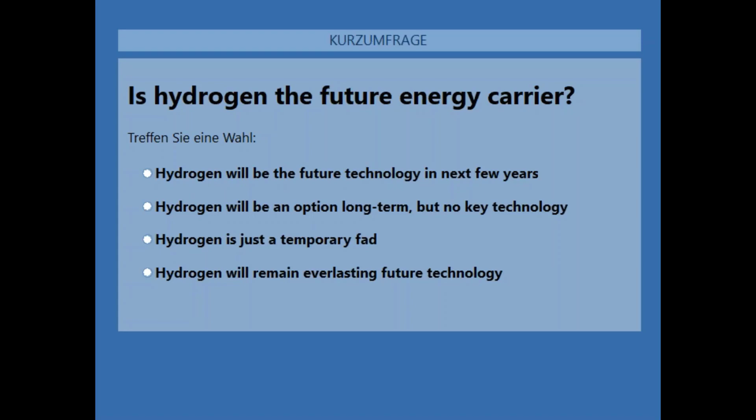Luckily, a lot of you, more than 90%, I guess, think that hydrogen will be a topic for sure. 36% think that it will be in the near future, and about 60% think that it will be an option long term. So thank you for your voting, and now we directly start with our webinar.

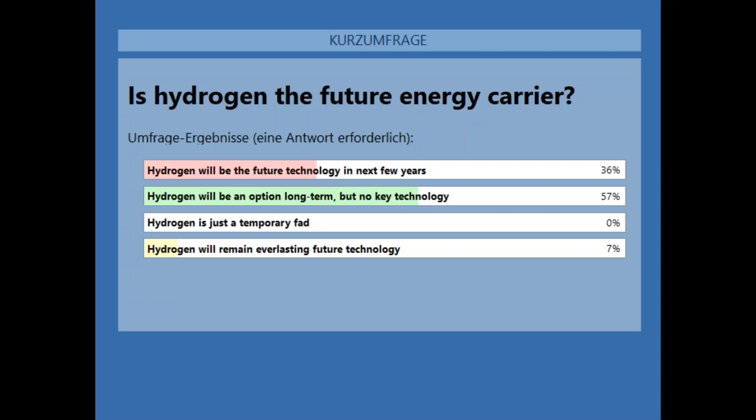So what's on the agenda for today? First of all, we will have a basic overview of hydrogen technology. Then we will have a short look at the Fronius experience. That means especially we will discuss our SOLH2UB, decentralized hub for solar energy. Then we will also have a look into the mobility topic. That means how can you run vehicles with hydrogen and also do commercial traffic with hydrogen.

But also I will give you an overview of hydrogen as seasonal storage, and at the end of the webinar we will look at the future of hydrogen and of course what is done at Fronius and what Fronius will do in the next few years.

But actually before we start, the question again: is hydrogen the future energy carrier? If you look back on the history of hydrogen, you have to go back into the 18th century. Exactly in the year 1766, Mr. Henry Cavendish, a British scientist, invented the hydrogen. Due to experiments, he invented the hydrogen. And from this time on, hydrogen is still a topic in human history.

If you look at the quote in the middle of the slide, one very famous person, Jules Verne, he was French, once said, hydrogen and oxygen will in foreseeable future secure world's energy supply. If you take a look then into the near past, in the 1960s, hydrogen was actually the fuel of aerospace. For example, for the Apollo mission of NASA, it was the fuel which was the basis for this mission.

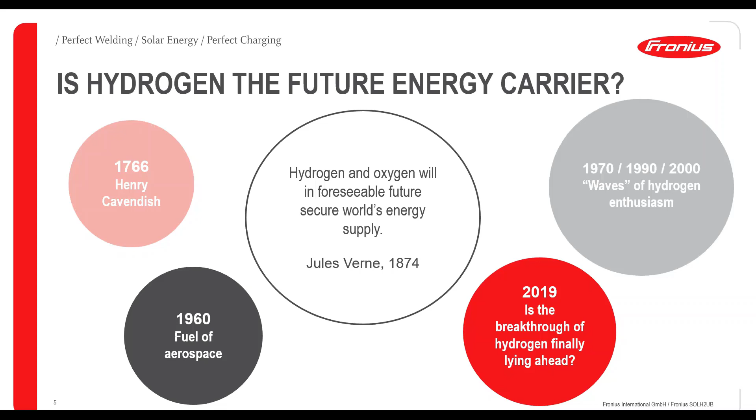Now we start with the basics in hydrogen technology. So what is hydrogen especially? Hydrogen is the most common element on the Earth, and it's nearly everywhere available. In the periodic table of the elements, like you see here, it has got the number 1, it's in the first period and in the first group.

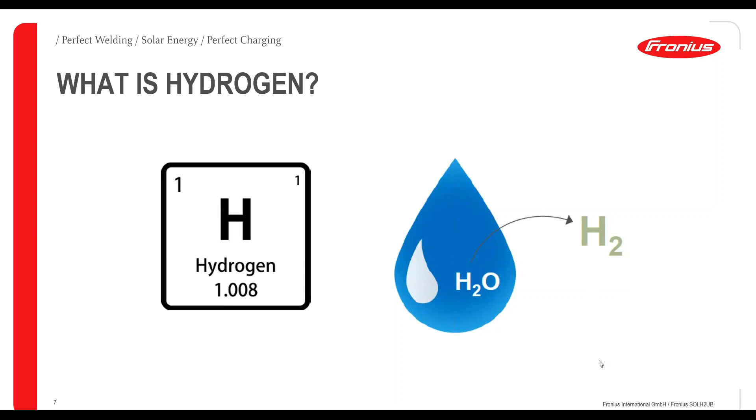That means it's everywhere available, but in the world, it's mostly accessible in bound version with oxygen, H2O. And therefore, the idea behind it is to split the hydrogen and the oxygen and save this hydrogen molecule in storage tanks, and therefore use it for powering or for mobility applications.

So if you look at hydrogen as an energy carrier, you have to say that hydrogen has a very high mass-referred calorific value. I compared here in the table three materials: hydrogen with gasoline and diesel. Therefore you can see especially the advantage of hydrogen. If you look at the mass-referred calorific value, it beats gasoline as well as diesel. It has nearly 3 times the calorific value of gasoline or diesel.

But on the other hand, it has a low volume-referred value. That means compared to gasoline and diesel we are not that well off. And that's also the reason for storage at increased pressure. With increased pressure, we of course increase the density of the hydrogen and can therefore store the hydrogen in very little space. If you compare hydrogen and gasoline directly, you can say 1 kilogram of hydrogen is equivalent to approximately 3 kilograms or 4 liters of gasoline.

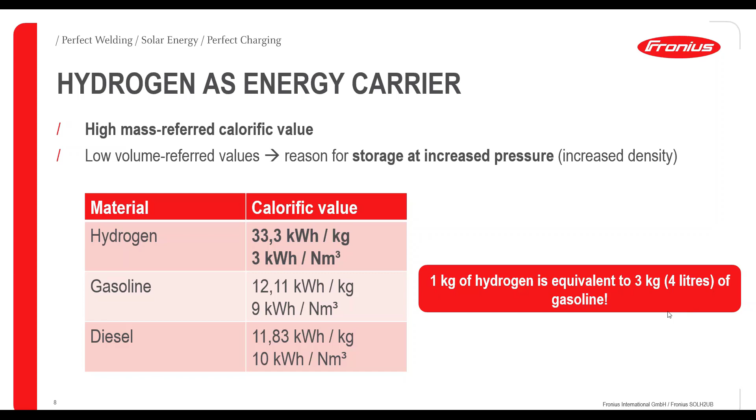So how can you actually produce hydrogen? Principally we differentiate between green hydrogen and gray hydrogen. The Fronius approach is to produce green hydrogen. But on a global level, today approximately 98% of hydrogen is produced as gray hydrogen. The difference between these two forms is, on the one hand, you have the primary energy, natural gas, crude oil or coal. That means fossil fuels, which you convert within a reformation process to the energy source hydrogen.

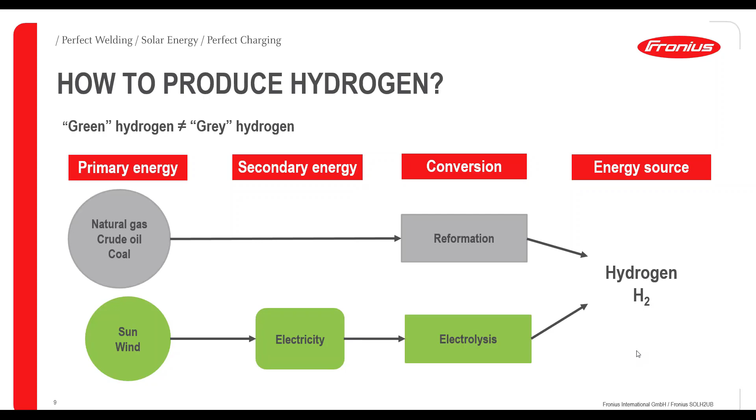In the green path, the path we want to secure and realize, we use the primary energy sun or wind, in our case of course sun, because we are producing solar products and we are into PV, to make electricity out of sun and wind, convert the electricity within electrolysis to the same energy source, hydrogen, and have the green path, and we are completely free of emissions to our nature. So how to produce green hydrogen?

I show you here a cycle of green hydrogen in our approach. Here we have the sun, and with the power of the sun, the electrical energy, we want to separate the hydrogen from the oxygen within the electrolyzer. The separated hydrogen is stored in compressed form. And if we need the energy again, we combine the hydrogen and the oxygen within a fuel cell, and therefore generate energy and heat. The only emission we have here is, of course, water. We are also trying to use the waste heat of the electrolyzer and fuel cell processes to raise our overall efficiency and become more economical.

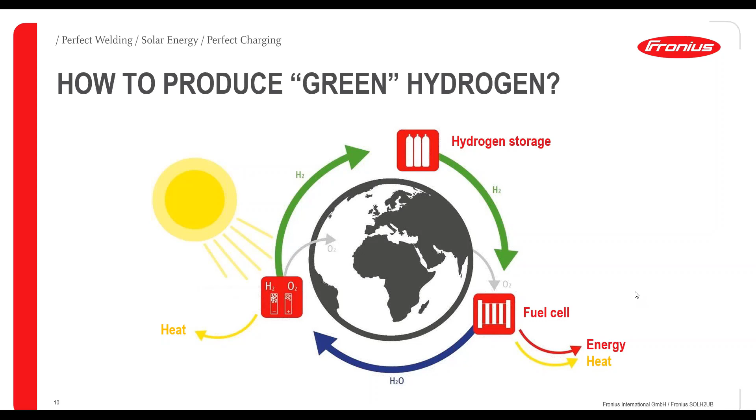If you look at the different paths of our vision, we have nowadays the common path. We have the photovoltaic generator, the inverter, maybe with a DC-coupled battery, and a Fronius smart meter at the feed-in point, where we use the energy for different appliances, or for example the mobility sector. The next path is the heating path, which we also want to integrate into our vision. That means we have, for example, the Fronius Ohmpilot for generating hot water. We want to do intelligent load management with heat pumps or other things. That's the second path, the heat path.

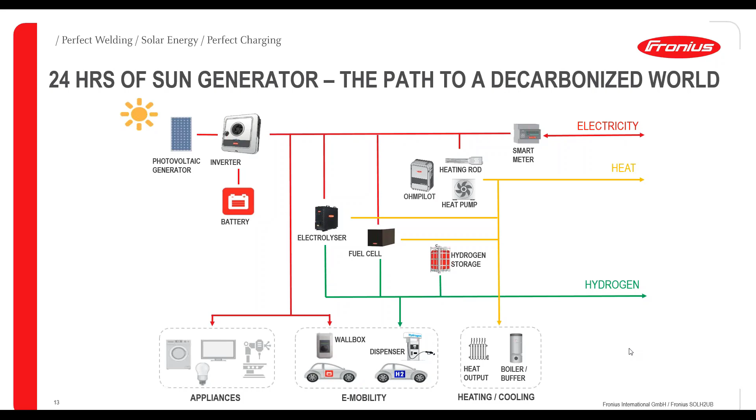And in the long term we also want to integrate the green path you see here, the hydrogen path. We want long-term storage of hydrogen in order to fuel our fuel cell electric vehicles, or use the energy in the grid again, or for other paths. That's fixedly integrated in our vision, and we strongly believe in a future with hydrogen.

We have already very long-term experience in this field of application. It goes back to the year 2002, when we actually started our H2 and fuel cell development at our headquarters in Austria. And over the years, we implemented a lot of things, starting from a HY-LOG project, that means intralogistic projects, to power to gas, also some wind to hydrogen projects, or an energy self-sufficient house with a small fuel cell in this house.

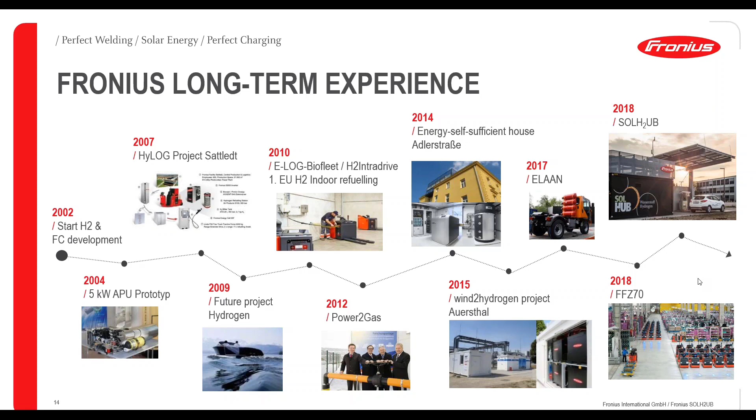And if you look now here, 16 years later, we have now, I would say, a very experienced product. We have the Fronius Solhub, which is already quite successful and ready to get reproduced. So this Fronius Solhub was a very big step last year for our company, and we already got a very high distinction for this project. We won the National Award for Innovation and Development in Austria. So that was really a very high distinction for us.

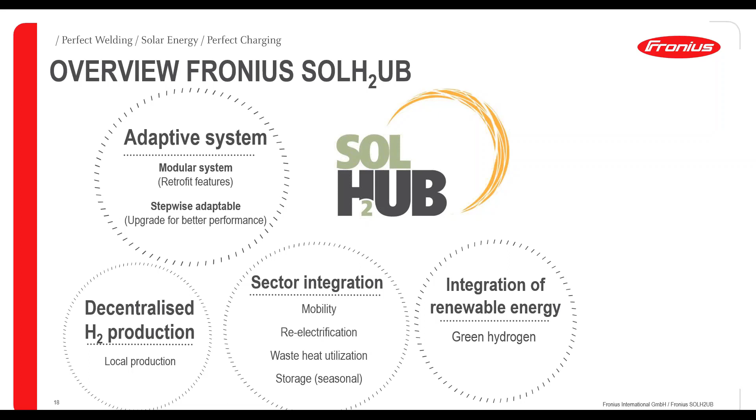We also want to use the waste heat, for example, for heating buildings or areas close to the Solhub application. And of course, storage is also very important. We focus on the green hydrogen approach. That means we do not want gray hydrogen, that means hydrogen out of fossil fuels. We use green hydrogen out of the power of the sun, produced with photovoltaic modules. The components, I will go into detail in a few slides.

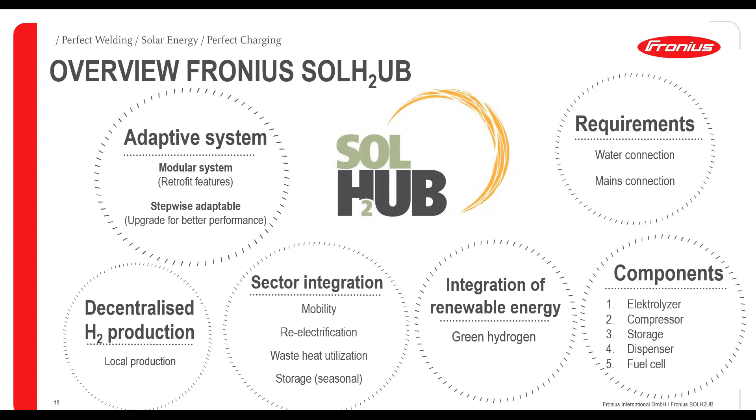And of course, the only requirements for the plant are a water connection, because we need demineralized water for the Fronius Solhub to produce the hydrogen, and a mains connection, so that in times of peak loads we use the excess energy for long-time storage in our SOLH2UB system.

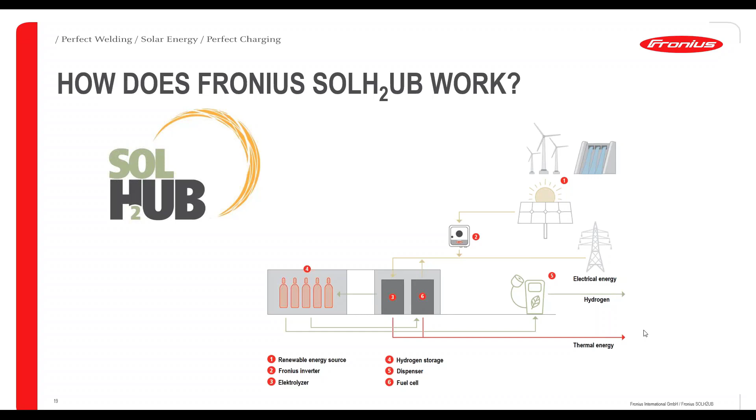How does the Fronius Solhub work? So we have got here a scheme. On top, of course, you have the PV modules or the renewable energy source for the green hydrogen. Then comes the Fronius inverter, where we use the energy in the electrolyzer, where the hydrogen and the oxygen are separated. Then we store it in the hydrogen storage, and here we can use it for mobility purposes or do a re-electrification in the fuel cell and give the energy back to the grid, or use it ourselves in the area.

So the key components of the Fronius Solhub are, of course, the PV system for green hydrogen. Roughly, you need 50 kilowatt hours of electrical energy to produce 1 kilogram of hydrogen. So that's the energy you need. I have to mention here that the system on the carport roof is not sufficient for producing all the energy. So there is a bigger PV array behind the Solhub, which delivers the necessary energy for producing the hydrogen. Then we have a container solution. So you see here the electrolyzer and the fuel cell.

The good point about this is that it's scalable and multipliable. And of course, there's also a possibility to utilize the waste heat in order to raise the overall efficiency of the Solhub and make it more economical.

The H2 storage: we have to mention that we focus on storage of compressed gaseous hydrogen. That's the difference, because a lot of other systems rely on liquid hydrogen. But with liquid hydrogen, you have a lot of problems with losses if you do long-term storage. There is the well-known boil-off effect. That means the liquid hydrogen is cooled down to around minus 253 degrees and then stored in tanks.

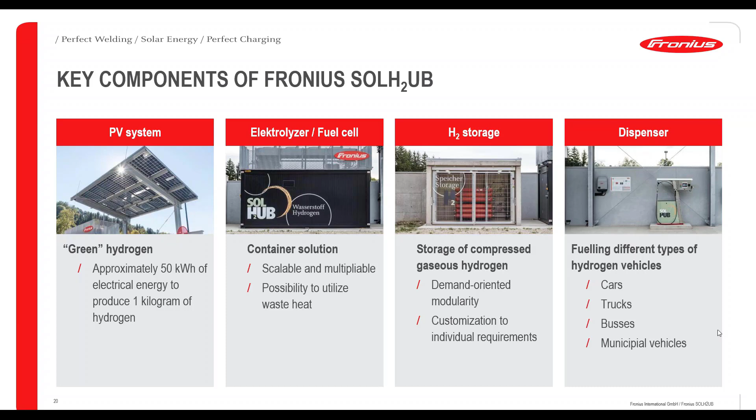And the last point here is the dispenser. With our SOLH2UB, we can fuel all different types of hydrogen vehicles. That means not only cars, but also trucks, buses, or other municipal vehicles can be fueled with our system, because we have two different pressure levels, 350 bar and 700 bar. So we can deliver both systems, again according to customer wishes.

So the key data of the Fronius Solhub: we rely on PEM technology. That means we have the polymer electrolyte membrane electrolyzer within our system. We can produce up to 52 kilograms of hydrogen per day. That's the maximum our system can produce. But we are scalable and multipliable to a lower limit anytime, of course.

We have H2 storage. So again, whatever the customer wishes: if he wants it for mobility purposes for cars, we can deliver a 700 bar system. If you have buses or other logistics, heavy truck logistics, we can deliver the 350 bar system. We can produce very high quality, above the industrial norm, with 5.0.

That means 99.999, five digits after the comma. That's our purity level, what we can deliver with our system. The output pressure, again, as the customer wishes, 350 or 700 bar.

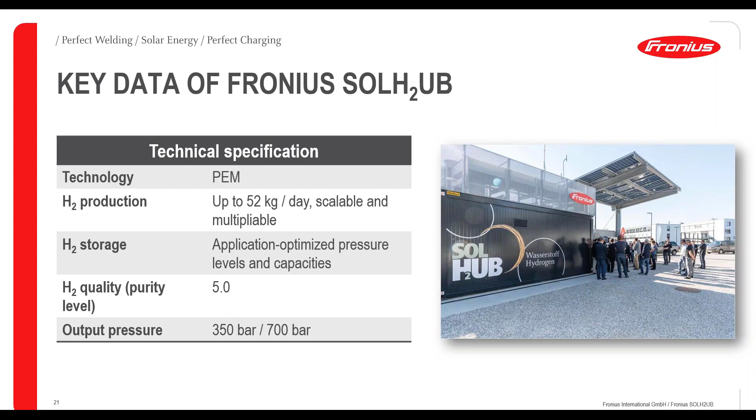So why is Fronius relying on polymer electrolyte membrane technology for electrolysis? Actually, that's the key technology for our SOLH2UB solution. The big advantages of this system are the small production capacities and also a very high operating pressure. We have very good experience with PEM technology because it's very easily linkable to our PV systems and our PV arrays. And scaling up or down is also very flexible, so we can easily adapt it, and it's perfect for our purposes.

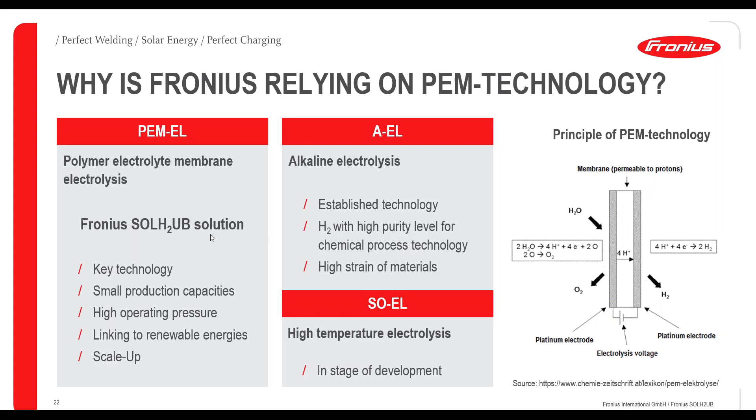Another possibility in future would be high temperature electrolysis, but today it's not state of the art, it's in the development stage, and so not a topic at all. So we rely on PEM electrolysis.

Again, the applications for Fronius Solhub. We strongly focus on the industry sector, with communes and of course logistics, but also agriculture applications. That's what we have the application for the Fronius Solhub. You see it here. You can, for example, fuel your trucks, your tractor, forklifts for intralogistics, or buses. So that would be one purpose for our Fronius Solhub.

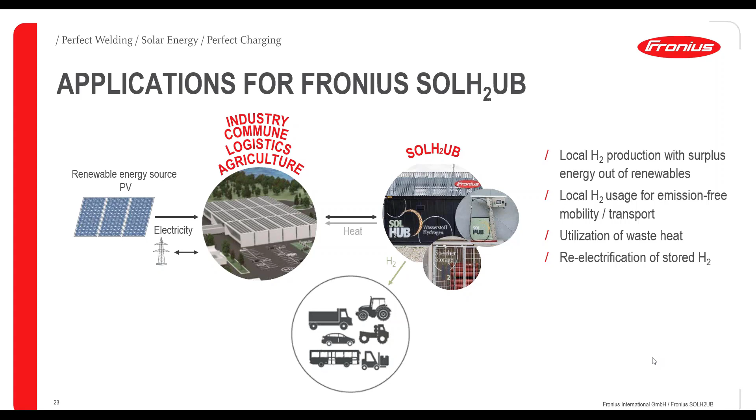But we can also provide re-electrification, so we can avoid or capture the peak loads in the grid. The surplus energy often occurs in summer, when renewable energies are working very well and there is not much demand from the public side, so we convert this surplus energy into hydrogen and use it, for example, in winter, when there is less energy available from renewable energy sources.

Next thing we will have a look at is the mobility part, especially how to run vehicles with hydrogen. If you want to run a vehicle with hydrogen, you also have to store the hydrogen in vehicles. The storage of compressed gaseous hydrogen is possible in two pressure levels of vehicle tanks: on one side 350 and on the other 700 bars.

This is really a big advantage of hydrogen, because the 700 bars is an industrial standard for vehicles. Compared to electrical vehicles, there are a lot of different types of plugs; there is no one common type. For example, a lot of Asian producers use the CHAdeMO or the CCS plug. There are different types of plugs, also one-phase and three-phase loading. But with hydrogen, you have this industrial standard with 700 bars, and that's exactly the same for every vehicle.

350 bar levels are mainly used in buses or bigger trucks, because the tanks are cheaper, you have more space for the volume, and you do not have to compress it to the higher level. But in the long term, experts think that buses and trucks will also go to 700 bars, and that will be the standard for the future.

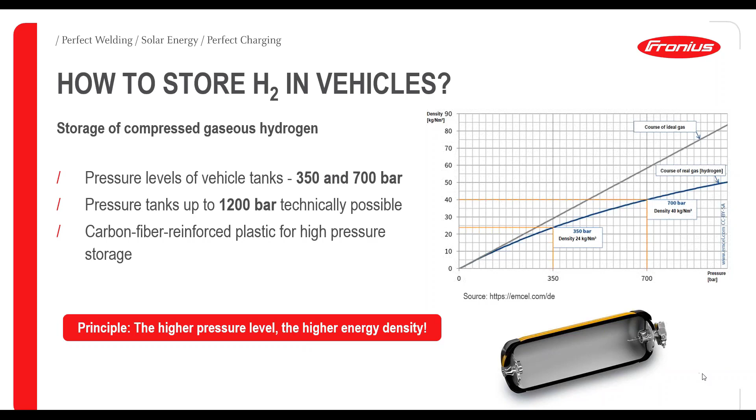Pressure tanks up to 1,000 and 1,200 bars are technically possible. The only problem is that at the moment they cost too much and are not commonly spread. A storage tank in a car, as in this picture, looks not that difficult. It's a carbon fiber reinforced plastic where we can store the hydrogen with high pressure. The principle is: the higher the pressure level, the higher the energy density, and the more energy you can store in less space. That's the main principle behind all hydrogen applications in the mobility sector.

But if you compare the hydrogen vehicle and the electrical vehicle, you can very well see the limitation of electrical transportation. At a certain range, you have such a high weight for your lithium-ion battery and overall apparatus that it makes no more sense to rely on electrical energy, because with hydrogen you have the same range with a much lower weight.

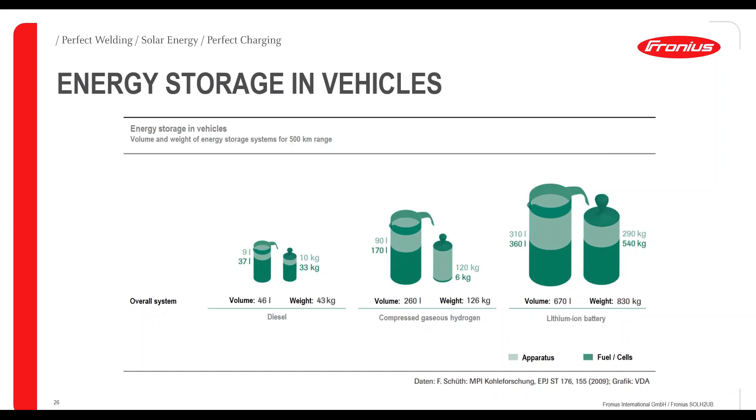That's the reason why we think for applications like trucks, buses or vehicles with long ranges, hydrogen will be the future and the energy carrier. That doesn't mean we completely disregard EVs, but it will be a combination of and commitment to these two technologies, so that each has its right place.

The functional principle of an FCEV, which is the name of hydrogen vehicles: fuel cell electric vehicles. Actually, an FCEV is an EV, because you have an electric motor and a power control unit, which an electrical vehicle also has, but on top you have the hydrogen tanks and the fuel cell. You gain the electrical energy not from a lithium-ion battery but from a hydrogen-oxygen fuel cell. The emission is water vapor, so there is no damage to our climate or nature.

Some vehicle types also have a small battery with a storage capacity of 1.5 to 3 kilowatt hours. That's because high load jumps aren't good for the fuel cell. To make the fuel cell run smoothly, you have this battery for temporary storage, to catch these peaks and secure the long-term functionality of the fuel cell. The overall efficiency of an FCEV is about 40 to 50%.

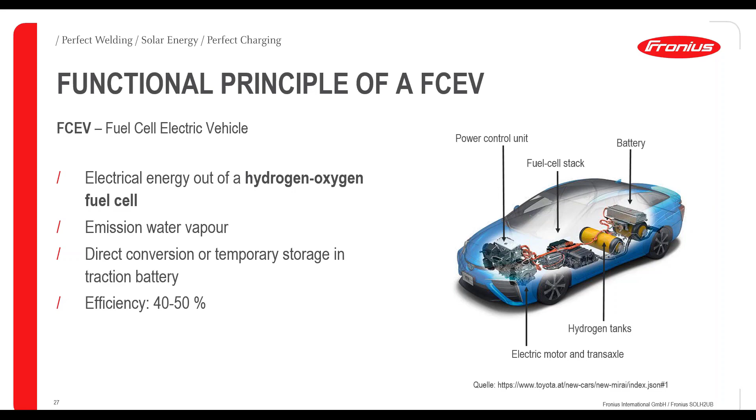What types of hydrogen vehicles are currently available? Fronius relies on the Hyundai Nexo, the first type here. In our company we have some Hyundai Nexos, which are fueled with hydrogen from our Fronius Solhub, of course.

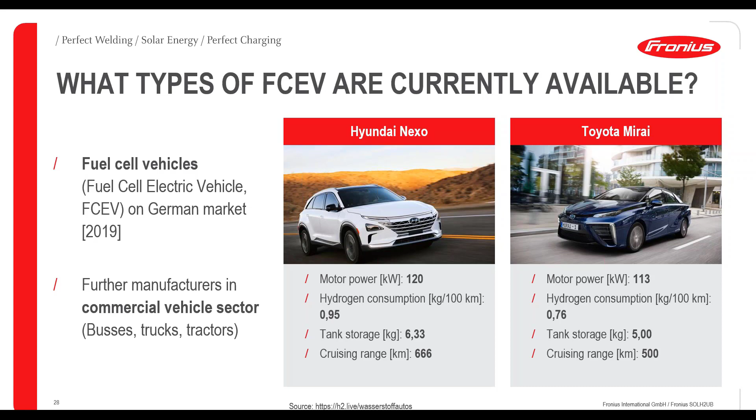There is another manufacturer, Toyota, which offers the Mirai, which will also be released next year as a new type. But there are also further manufacturers in the commercial vehicle sector. So if you want to have a hydrogen vehicle, it's actually accessible and everybody can buy it. So it's no future technology anymore.

So Fronius Solhub, what are promising project examples of hydrogen in commercial traffic? One slide with the mobility. If you look at the European Union, it is also forcing hydrogen, and they also see a future in this type of technology. There is a support initiative, the JIVE initiative, which funds more than 300 hydrogen buses, and they are running at the moment very well. So you have emission-free local transport, and there are some success stories which will maybe be extended in the next years.

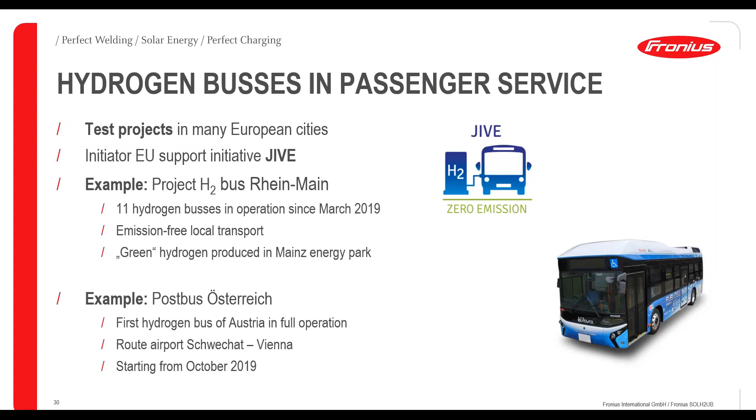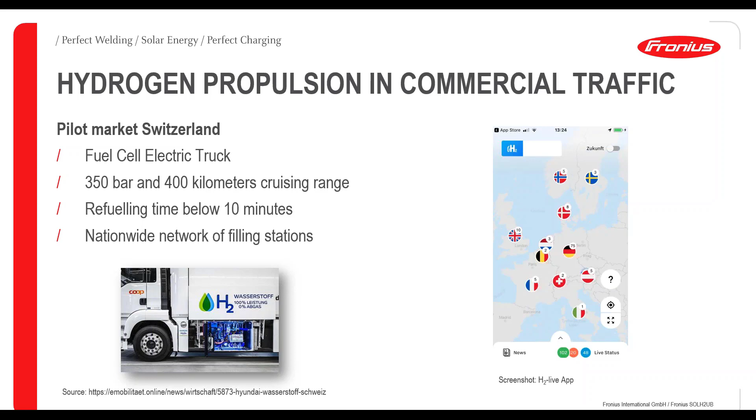But the mobility sector is the one part. The other part is hydrogen as seasonal energy storage, which will also be available with our Fronius Solhub. So what's the idea behind it? I put here one slide of a 600 kilowatt peak PV array in Austria. You can put any PV system in middle Europe here, because the production looks the same for every PV system. In the winter months from January to March, you have very low production. Also in October to December, there's very little production. But in the summer months, you have a lot of production.

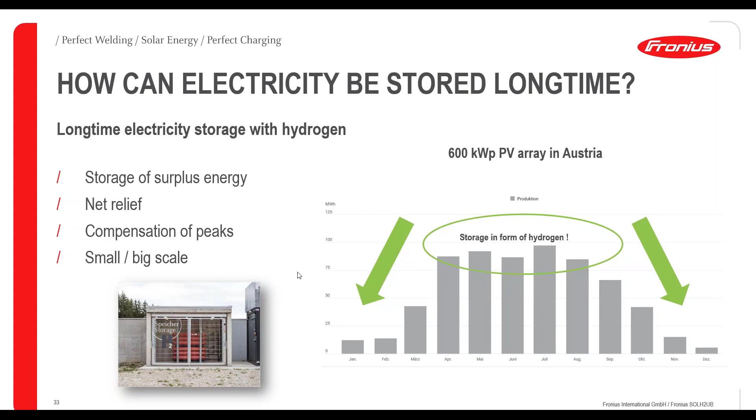That means sometimes there is too much production, too much energy, which is not necessarily needed in the system, in the grid, which can be stored in the form of hydrogen. There hydrogen comes into the game, and you shift these peaks to the winter months, where we actually need the energy, from the surplus in the summer months. It's of course a storage for grid relief. We can also compensate peaks, and with our SOLH2UB we are adaptable. We can do small and big scale. Good. That was basically the purposes of our hydrogen.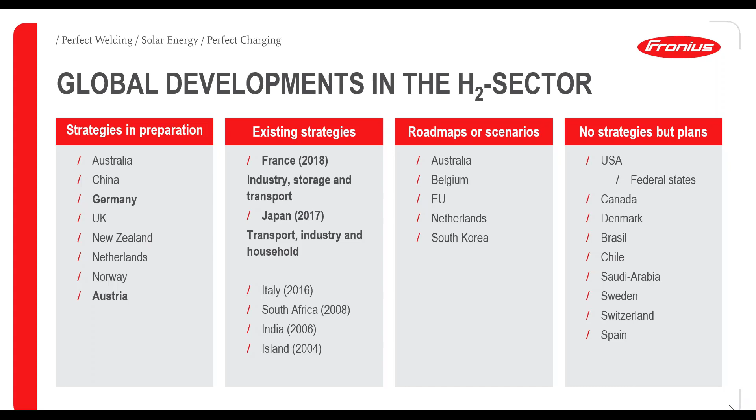Now we look at the future of hydrogen. What is done currently worldwide, in Europe and also in Austria. If you look at the global developments in the hydrogen sector, a lot of countries already have strategies in preparation, or are currently working on roadmaps and scenarios. I have listed some examples. Maybe you can find your country here. One thing I want to point out is that the most successful country, which really is into hydrogen, is Japan, or some Asian countries which have long-existing strategies and really want to make hydrogen technology available in the near future.

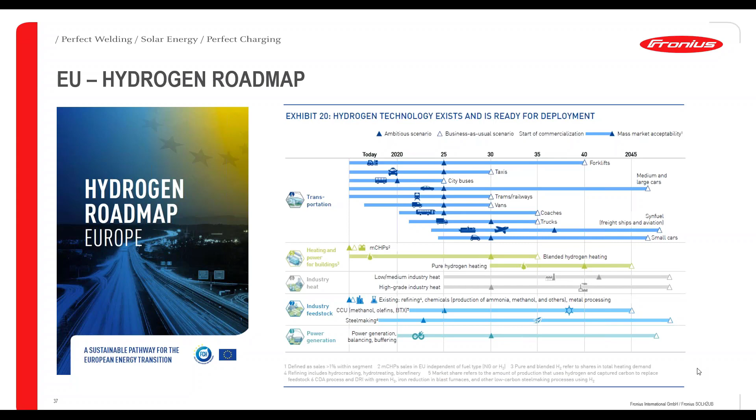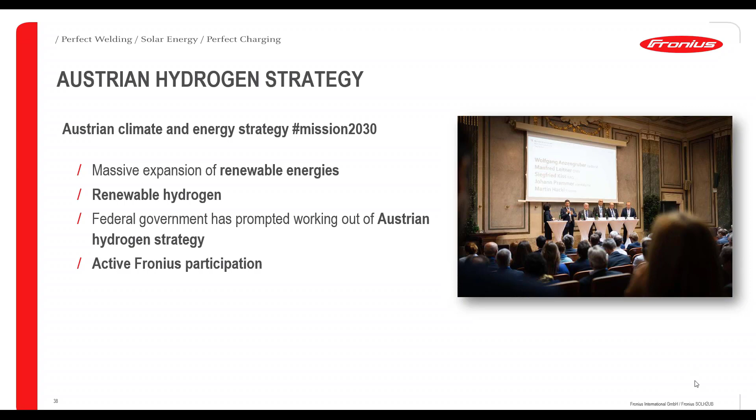So, we come to the last points, what are now the next steps of Fronius regarding hydrogen and hydrogen in the future? So first of all, we made the decision to open a Fronius Hydrogen Competence Center. Actually, it is not opened yet. It will open next year. It's currently under construction. So there will be a Hydrogen Competence Center in Upper Austria.

We also want to do further research into the system and in hydrogen overall. We have also got the necessary laboratory infrastructure at our competence center. And we also want in the near future to realize demonstration projects with external partners and customers. And of course, there will also be training facilities where groups can visit our center and see everything about our hydrogen competences.

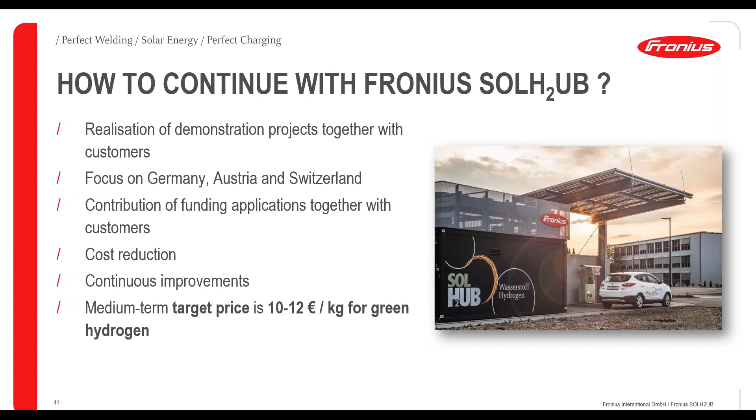A common question is also how future projects will look, or what people ask us for in terms of systems. So possible application scenarios include refuelling systems, of course, the mobility sector for industry, communes, or agriculture. Also, some communes are asking for seasonal storage in order to do re-electrification, and of course also use the waste heat of the fuel cell and the electrolyzer.

The key arguments for such projects are mainly that they want to make energy flagship projects. These are often climate model regions and climate alliances, which of course also want to have a marketing value and gain some good reputation with a Fronius Solhub on site.

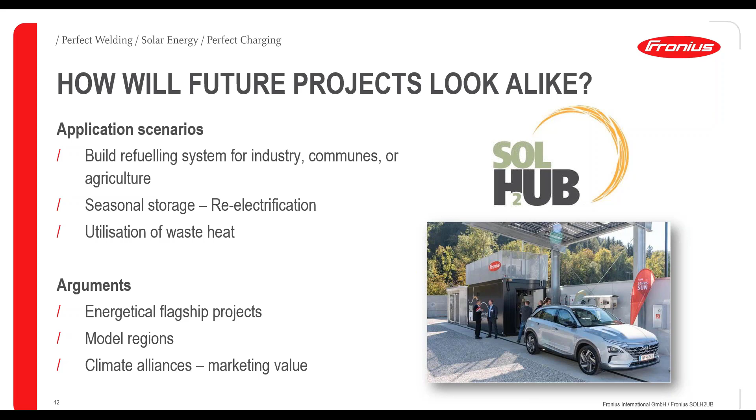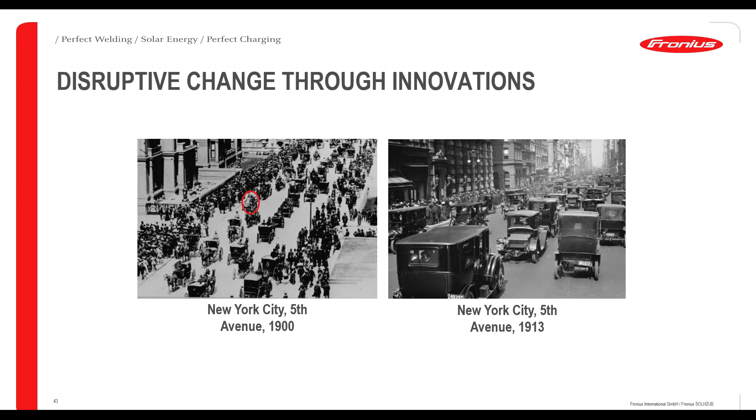The last slide I would show to you is a disruptive change through innovation. If you look at Fifth Avenue in New York City in the year 1900, you see a lot of horse-drawn vehicles and one gasoline-fueled vehicle. But if you look at the same street, Fifth Avenue in New York, 13 years later, you see a completely different picture where everything relies on fossil fuels and no more horses are going through the city. So I give this closing slide to you. Maybe we will face the same situation with hydrogen. So we will see, and we will definitely be curious how everything goes in the future.